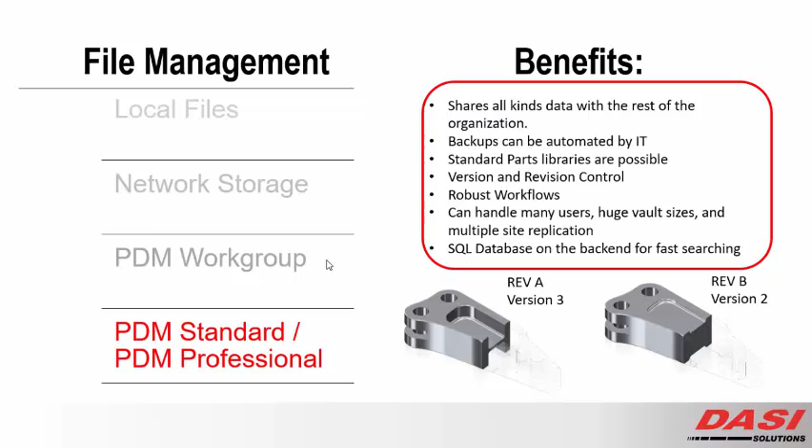So here's some of the breakdowns there. This has been a direct replacement to Workgroup. Each seat of SOLIDWORKS Pro is equal to one CAD editor license inside of a Standard environment. The Workgroup contributor and viewer licenses convert over free of charge. I recently went through this at another company. They had bought 6 or 7 contributors and a 5-pack of viewers. We filed some paperwork with corporate, and they became PDM Standard functionality moving forward.

It's built on SQL Express. And then probably most importantly, it has a direct upgrade path to PDM Pro. So if you choose to go from Standard to Pro, I basically have to back up a database, run the software upgrade, restore the DB onto SQL Pro, and then I'm just moving all the clients to a Professional level license. That is not the conversation going from Workgroup to PDM Pro. Workgroup has to get extracted, and it's cryptic at best. We can have that talk if you have any Workgroup vaults, but there's a lot of different things you need to go through.

Here are some of the overall features, which I talked about: workflow, users, groups, permissions, version and revision control. But as I mentioned down here, it's built on SQL Express, one workflow. It's only got 2 revision scheme capability, no API, no automated tasks, and no template capabilities. Which, of course, in PDM Pro, all those move into feature level.

So I put a little star next to replication. That concept gets a little more complicated when it comes to 2017. They're now offering database replication as well as archive replication. Archive replication is pretty straightforward. That's your CAD data copied to 2 locations for use. Database replication is more for performance in high latency WAN environments. The companies that are looking at DB replication are global companies, typically speaking. But if you have any high latency in the States, we can have that chat as well.

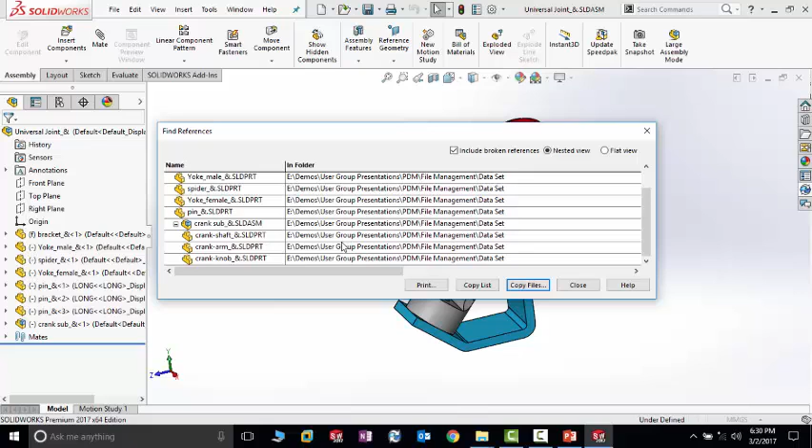And this kind of goes back to the conversation of all your standard parts in your job directory, right? If all this is pointing to the same folder, you don't really have any standard parts going on here. It's copied everything there. You should see standard parts going out to a standard parts directory on whatever parts are applicable, and then only the job-specific files with respect to these references here.

Closing that assembly off and closing out of SOLIDWORKS, and I guess one thing to understand from a RAM perspective is that assembly is still loaded in RAM. And I want to make sure everybody's aware of that as well. SOLIDWORKS purposely holds on to that assembly in RAM so that the next time you open that assembly, it's going to open faster. The downside of that is it's stuck in RAM. So if you try to rename it or move it right now, you're going to run into problems, right?

This is emphasized even more on a network drive location because if anybody has that thing open on a network drive, it's not going to want to rename because it's in use by Windows somewhere. So whenever you're doing any renaming or moving of data sets relative to a SOLIDWORKS file, close SOLIDWORKS in between. If you're not already, I'd highly recommend closing SOLIDWORKS at least once a day. Say when you go to lunch, close it, reopen it after lunch.

I've talked to countless users that tell me, yeah, I crash around 3 o'clock every day. It's because you ran out of RAM, right? SOLIDWORKS built RAM all day long, and around 3 o'clock, you filled it up and it started running sluggish. So if you can get through a 4-hour day of all the data sets you're working on and close in between lunch, you can avoid a lot of those problems.

And it's real easy to watch that. You just look at the task manager. Under performance, it'll show you the CPU usage as well as memory. Looks a little bit different in Windows 7, but what you're really looking for is how high you're spiking your overall RAM, and you want to stay away from the upper echelon of that. More RAM won't necessarily make your computer faster unless you're maxing out RAM, right?

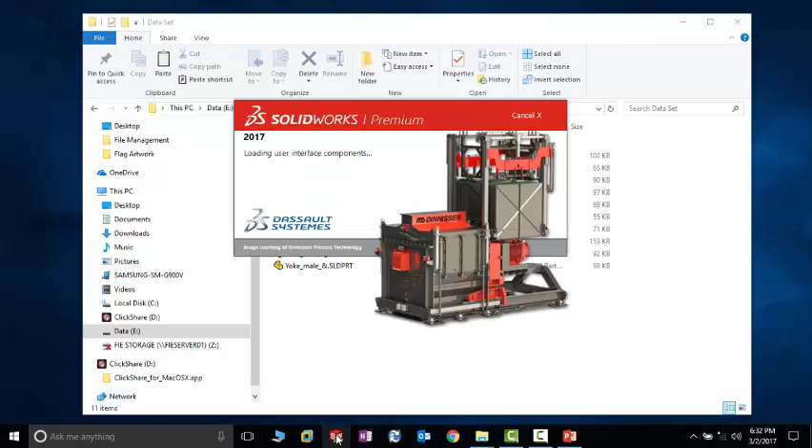So I'm going to go make the critical simple mistake, right? I'm going to go rename this bracket to, I don't know, new bracket. So this is what this needed to be called now because purchasing didn't like the name of it or whatever, and somebody goes in on a network drive or otherwise and renames that thing, and it's now caused downstream problems in SOLIDWORKS. So like I said, it's a pretty easy and very common issue that I've seen.

You go to reopen this data, it pops up and you get this error message. It says that it can't find this file. What do you want to do about that? If you're not getting this error message, it's probably because you checked that don't show me again box, right? All right.

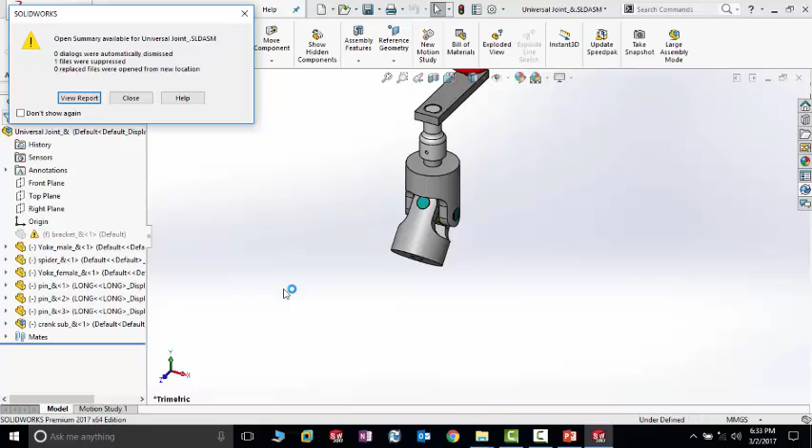I'll show you where to turn that back on, because without it you're going to have a hard time finding your files that it disappears on, right? In newer versions of SOLIDWORKS, I believe this came in 16, they started doing an open summary, and it actually tells you, and you can view a report of the files it could not find, what it was able to locate relative to the data sets and what the problem with that was.

More often than not, it's going to not find the data set, and it then suppresses that file in the feature tree over here. If you try to unsuppress that data and it still can't find it on the hard drive, it's going to prompt you to browse for that file again, right? So this is a way, if you have that option turned off, to be able to go and get the data.

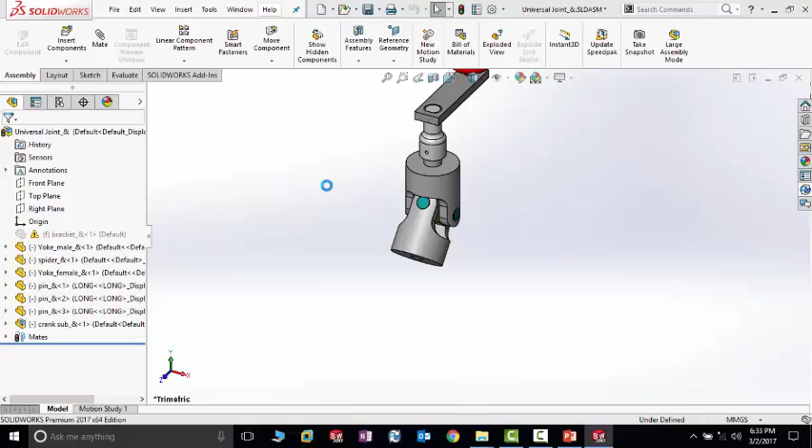And if you browse out, and now I know it's called new bracket, of course I can point back to that. It'll try to load the new data set, and provided that was just a rename, you should have no errors downstream. If that was a save as or another bracket completely, you're asking for some mate error problems downstream there, right?

And as a whole, if you're going to make a similar but different part as a replacement, save as is really important there, right? Because if you just make a new bracket from scratch, even if it's the exact same dimensions, it's a new bracket. It got a new header, it got a new numerator in the background on every line and every edge on that file, so every mate's going to blow up downstream relative to that.

And they're doing what they can with that. I've seen some progress over the last couple of releases, and in 2018 the ability to swap and find new edges and references is getting better. But as a whole, doing a save as is really important there.

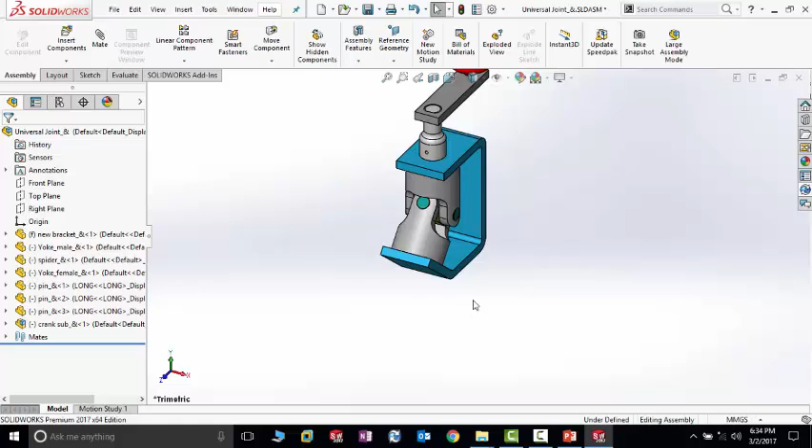So speaking to that, another really simple but important thing I want to clarify is the difference between save as copy and continue, and save as copy and open, right? As you go to do a save as on something, I'll go grab this bracket again. If I go to do save as, a very important dialog box that no one ever reads pops up. And it clearly states exactly what these functionalities do, but I see countless users break references anyways.

So the save as is changing out the file references on all open documents. One really fast way I've successfully swapped out a standard part before: if you're in PDM, you do a where used, you find this bearing is used in 5 assemblies. Go open up those 5 assemblies, and if you do a save as to the new bearing that you want it to be and change some numbers, you're swapping 5 references downstream, right?

The flip side of that coin is if you did a save as and you didn't mean to swap references, you're breaking old jobs. So there's no right or wrong answer to this. It's what are you trying to get done, right? The lower two are much safer. Save as copy and continue and save as copy and open will not affect any open references in SolidWorks right now. The only real difference between continue and open is what's open in RAM afterwards.

And they added this save as copy and open a couple of releases ago. In earlier versions of SolidWorks, it was just save as copy, and you didn't have the new one at your fingertips. You had the new one saved in the hard drive someplace. You had the old one at your fingertips. And then people would go change the wrong part, and now you're doing a replace or something downstream, right?

So save as copy and open kind of helps with that. It's saving the copy of the bracket, opening that one in RAM for changes. One thing to be careful of when I do a save as copy, and I'll do my favorite thing I see on the network, my new bracket. I'll do a save as copy and open. It doesn't swap out the loaded file in RAM here with the new bracket, right?

So if I made some changes to this thing, let's say I changed the diameter of the hole or something, close and save that. New bracket's still open in RAM, right? So they look identical except for that change that I just made. So save as copy and open doesn't swap the file in RAM. It just also opens the new one. So be a little careful with that.

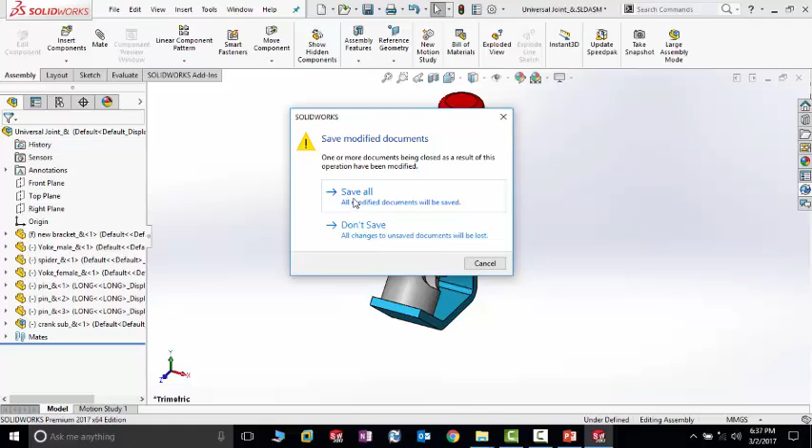And in that case, this is now referencing just my new bracket relative to that, right? If I wanted it to reference the new bracket, and I didn't really handle that on the way in, you can do it during a file open. So one other thing I like to point out from a really simple file referencing standpoint: almost everybody I talk to just double-click smashes through opening a file, right? And you're missing out on a lot of options when you do that.

When you double-click and open a file through the open dialog box, you're telling the software to open that fully resolved with every reference that it last had. Alternatively, if you just left-click select it, you get a ton of options in the interface as you go to open. You can open lightweight, large assembly, large design review mode. You can open specific display states or specific configurations.

And then more to my point, you can click on this references button and actually point it to what you're looking for. So I can see it's looking for the new bracket here. If I simply double-click and say, no, I want to reference this other bracket, you'll notice the file name updates in green. And as I say okay and open, it's going to be referencing the new design, which I don't know if I made the hole big enough to see past the crank. But there's the larger hole. And I'm referencing the new file bracket here.

So when I save, it commits that to the hard drive or the file header on the assembly. Important to note that last part. Just because I said open the new bracket right now, if I do not save this assembly, it's pointing at the old bracket next time, right? The save operation is what actually writes that to the file header.

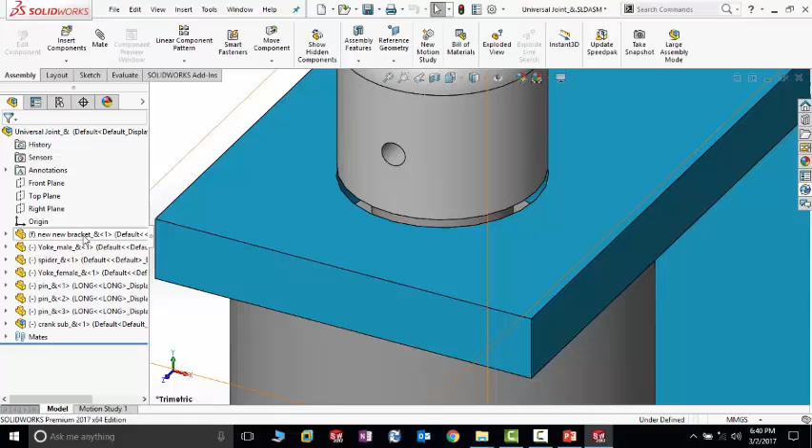I'll go ahead and close that off, close out of SolidWorks again, release some files from RAM. Sure. Yep. So you can get to this SolidWorks folder pack and go. This is launching the functionality for pack and go through Windows Explorer, or through SolidWorks Explorer here. You can get to the pack and go from here. You should see 4 more options here. You should see a SolidWorks move and a SolidWorks rename as well.

I may have gutted parts of my install for Explorer. I don't find the need for SolidWorks Explorer so much once you have a PDM Standard or Pro vault, because it's handling all the file references inside of the vault. Right. So this is definitely a good solution in the meantime. And notice that when you pack and go from here, it's firing the pack and go.

But it's trying to look for reference information relative to the file explorer, the folder, the SolidWorks Explorer in the background. I suspect with 17, though, I've probably taken Explorer off, which is why I don't have those. Probably need to turn them back on.

But one thing to note inside of here is this select and replace functionality, which is really, really important. Because down here, the add prefix and suffix, this is how you get the new bracket, because all it's going to do is append more text to it. So in the real world, what you probably have is some kind of job number that makes this thing unique, right? So select and replace will do a really nice job of that. So if I'm looking for the word new and I want to replace that with 123 or something.

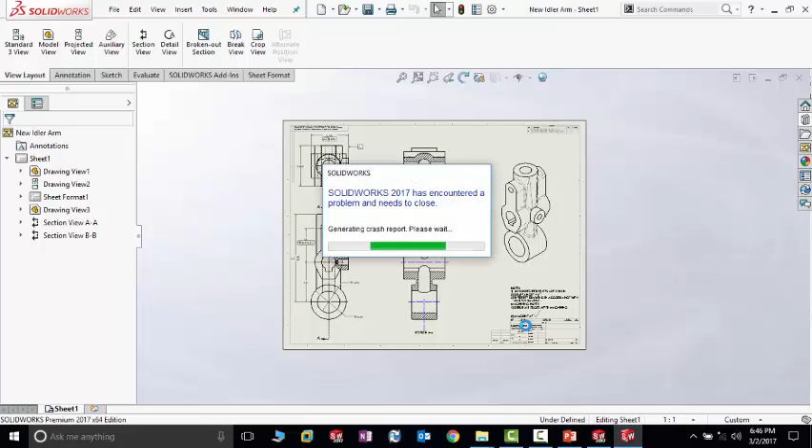So now when I go to make changes to that, SOLIDWORKS will save off the new drawings. Let's see if it actually got through that. Hey, I got the files. So, that 17 again. Tell them I've seen this error before.

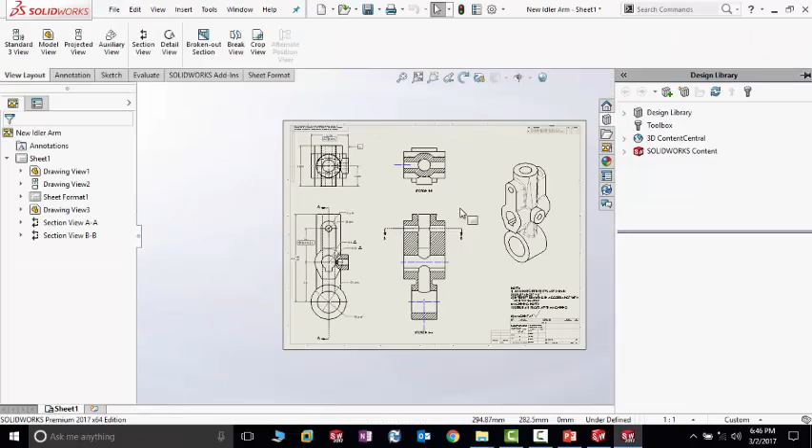And that'll open up and now reference the new idler arm part, right? So if I open up this particular part file, it's referencing the new part relative in the background, right? And that's a really good way to avoid damaging references on old machines, old jobs, and things like that, right?

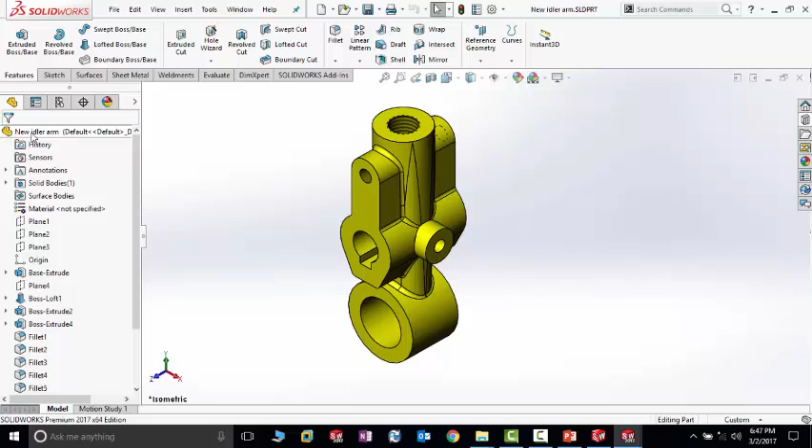And I admittedly did it the wrong way for a long time. I went save as on part for a long time and then found myself redetailing things all the time, right? Which I probably should have found a way around a little earlier on. I started my life as a detailer and kind of did myself a disservice there.

So that's some of the basics of SOLIDWORKS file referencing. I think I got somewhere around 10 minutes left, so I'll show you some of the PDM side of things as well. Like I said, I don't really have Workgroup installed, as 17 is going to be its last release.

Our PDM products, both PDM Standard and Pro, have the same interface, and they look pretty much identical to Windows, right? It's got additional right clicks and options inside of here. But one of the main goals of SOLIDWORKS PDM is to reduce the learning curve to something that an end user already knows, right? So if I want to make a new folder, I just right click and make a new folder. If I want to drag and drop data sets in, I can do just that.

So if I were to go grab all this, I can drag drop, I can right click copy, paste. And what's happening right now is it's adding all this data to my local vault view. This finish add operation with the bar you're seeing on the screen right now is communicating with the database, letting it know that 10, 15 files just got added to the vault, right? They're currently checked out by me. It knows their size, their state in the vault, the last date modified, the computer name that they're checked out on.

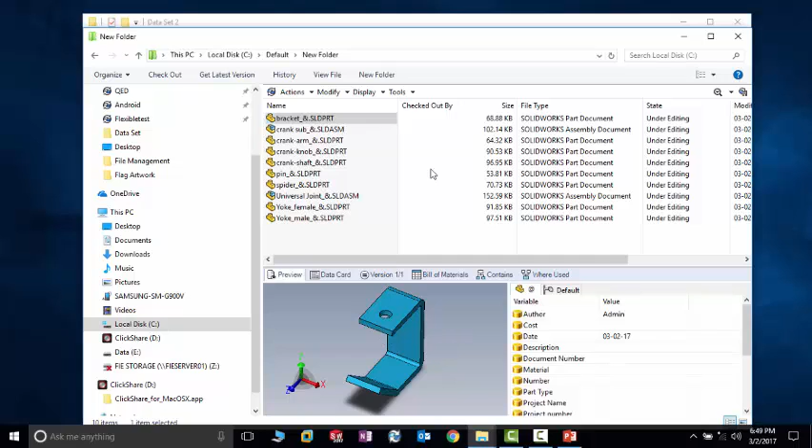So down here, you get full eDrawings Professional preview inside of Windows, so people without SOLIDWORKS can spin around your 3D CAD model without having to open it. It's just right in this preview window. Any given sub-assembly, full assemblies down here, drawings will pan, zoom.

We can preview 40 different file types, I think, inside of PDM at this point. So Word docs, Excel spreadsheets, Outlook message files, PowerPoint presentations. You can preview whatever you're looking for. You can get to multiple sheets and different views inside of the right-click menu down here, and you can even print direct from the preview down here.

You'll also get something called a data card inside of here, and I kind of alluded to this earlier where you're storing all that metadata property information, right? These cards are completely customizable. I can store part number, description, heat treat, finish, any custom properties you want get customized onto this card. If they're properties on the SOLIDWORKS files, they automatically write onto the card. If you put them on the card, they automatically write to the SOLIDWORKS properties in your file.

So just two-way street. And here's kind of where it divvies between custom properties and configuration specific properties, right? So you see this @ symbol here, that's your custom property, and then your configuration names downstream from there, if you prefer to have configuration specific properties, right? I personally try to avoid them, but it's unavoidable at certain organizations depending on how things are consumed downstream.

I mentioned earlier that all data inside of a vault gets version controlled, right? So all these files are at version 1 of 1 the first time I put them in, right? I've also got a bill of materials baked in, and I can see full bill of material capabilities on an assembly inside of here. This can get saved off to Excel spreadsheet, CSV file for consumption downstream as well.

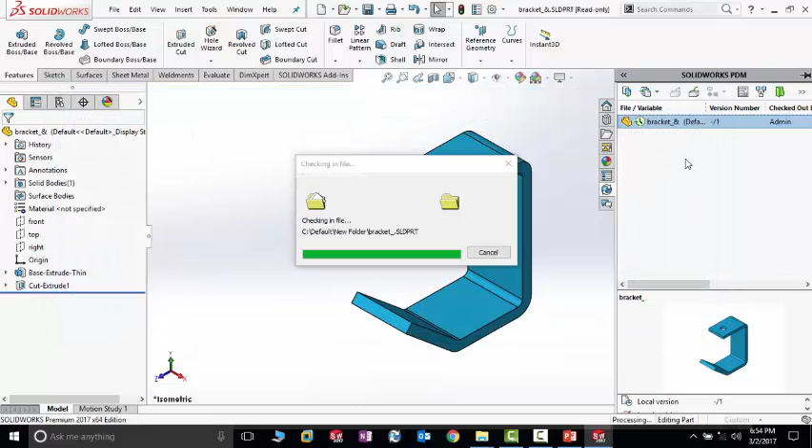From here, I can simply check this data in, put in a comment, whatever it might be. And then if I'm looking to push that to the next guy in line for a review process or something, you can do a change state right from here as well. And this will move a file through the workflow for submitting for approvals downstream based on whatever workflow that you've built in the backbone.

When you close that data back off and back in the local vault view where that data was stored, what you'll find on bracket here is it's now on version 2 of 2, right? So if I go take a look at the preview on that, I now have the longer bracket. One of the really cool things about PDM is I can get back to prior versions as well.

So under this Actions tab right here, I can get the prior version of this thing, and it locally caches 1 of 2, and I now have the shorter bracket again. So if you're ever wondering what the difference between drawings, bill of materials are, that's at your fingertips relative to each version downstream. And then to make sure you're always working with the latest data set, you just right click and get latest version, and that'll go and pull down version 2 of 2 again, getting me back to the latest changes, right? And you don't have to do that on a per file basis, right?

I can go to the entire vault, I can go to the entire top level folder, and it will query that folder looking for what it needs to pull a reference on if it needs the latest file off of that, right? Can't stress enough, it's important to do a get latest in a PDM environment. One of the benefits of PDM is it's giving you multiple versions of a file. One of the downsides is there's multiple versions of a file, right? So you need to make sure you're working with the latest one when you go to print that and work downstream, right?